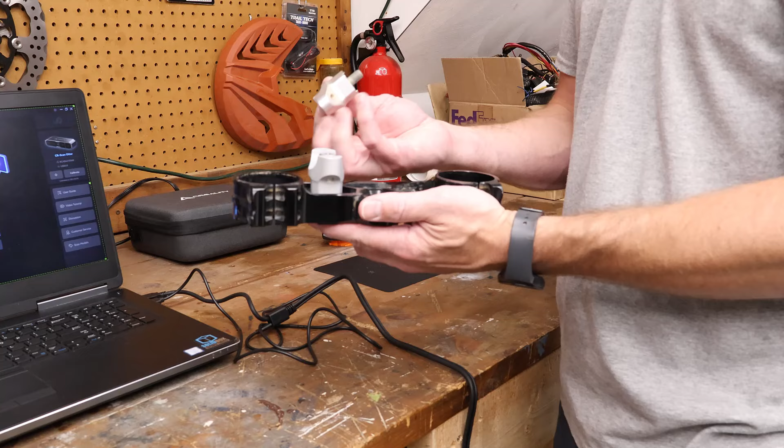The other part for the triple clamp, as I mentioned, generally we want it to be off the platform just a little bit. There are options for us to remove a table when we're scanning, but in this case, what I'm actually going to do is take the bar clamps from the top side. They don't fit perfectly, but they fit just enough on the bottom that I can use them as standoffs. The way that KTM does these, they're actually offset, so I just need to offset them on the short side and make sure that I bind them just enough so that I can set this up and have it be raised up off the area.

The other thing that we want to do is have these sort of paper towel or paper crumpled pieces scattered around random places. Now I'm using the black mat that came with the CR-Scan Otter. It doesn't have any marker dots on it, but it helps give a good contrast between these small white pieces of paper. And we want these sort of around, and what that does is it helps us with these features on this mat. So as we go around the outside, it'll help capture those details a bit easier.

You can place them on the part, but just note that it's going to be a little bit more difficult for us to remove those later. So in most cases, I just try to place them in random places around the object, so that way I could capture it. We're going to be scanning this in medium size object mode, which means the scanner is going to be pretty far away, and it'll capture almost all of the clamp in a single frame. And with this part, we may end up doing it in medium, or we may end up doing it in fine. I haven't quite decided yet. We'll just have to see how it works out.

Now that we have everything sort of ready to scan, I have a couple of other things in here. Sometimes I'll use sockets. These are black impact sockets, but we can also use chrome ones because those won't really get picked up by the scanner. Sometimes you can use these to stand your objects up a little bit higher, and that will help so we can get around the bottom side, around these lips. With this gas cap, it sits up off the ground or off the table by itself, so we don't really need these. But it's handy to just have little things like this around and make sure they are the same height if you're using multiples.

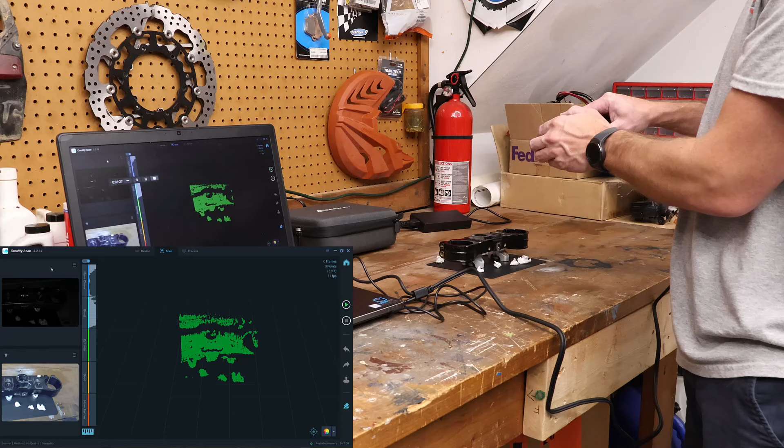So from here we can select scan. I generally like to go in and use manual exposure. And then we'll grab the scanner and use the plus and minus on the scanner itself to get to a good exposure level.

We do want to pay close attention to the distances, the move closer, move farther, and optimal. With medium scan mode, we're sitting at about 10 to 12 inches away from the object. If we go any closer, then you'll notice our exposure value is going to kind of be a problem. You can start to see those red highlights on the corners, and the preview in the center of the screen shows that they're not being picked up. So we do want to make sure we get that exposure value right.

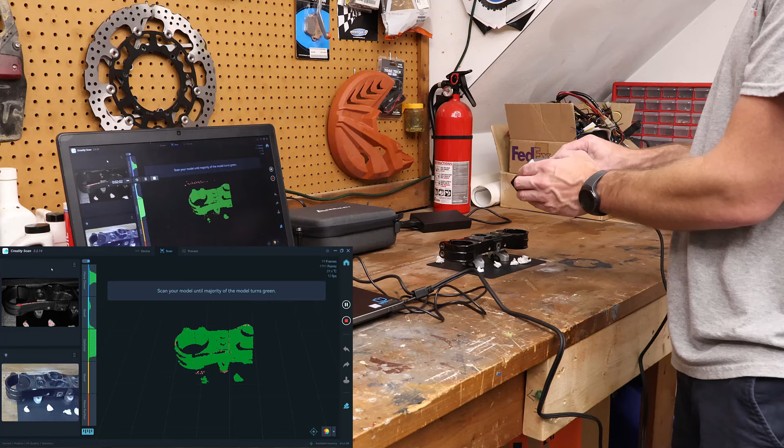And once we're happy with this, go ahead and hit play and start capturing. The first thing that I want to do is capture one side, and I also want to make sure that I am picking up those paper towel markers. Those are going to be important as we go around the outside corner.

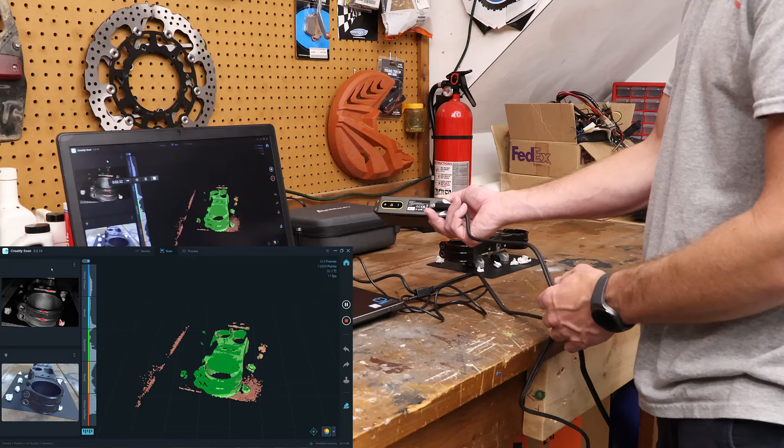Now you can see that we're capturing at about 11 frames a second. The 11 frames a second will change if we're using small mode or large mode, if we're using fast or high accuracy. You'll see a fluctuation in those values. With objects like this, we're generally going to see somewhere between 15 and 20 frames a second as being pretty average. I don't think you're going to get much more than about 20 frames a second on medium or large scans. So everything's looking good so far.

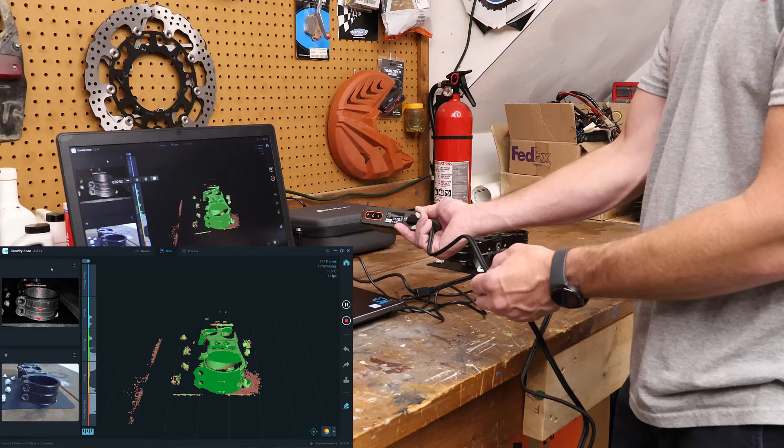I'm just gradually moving in and out, even though I'm outside of the optimal range. I just want to make sure that I am capturing the geometry. If we lose tracking, just move away until you can see some of those paper markers. And we're going to just sort of work our way around the outside here.

Again, trying to get as low as possible. This is where having it spaced off of the table or workbench is important, because we can get down to that bottom edge, capture as much detail as we can there. We are going to flip the clamp over.

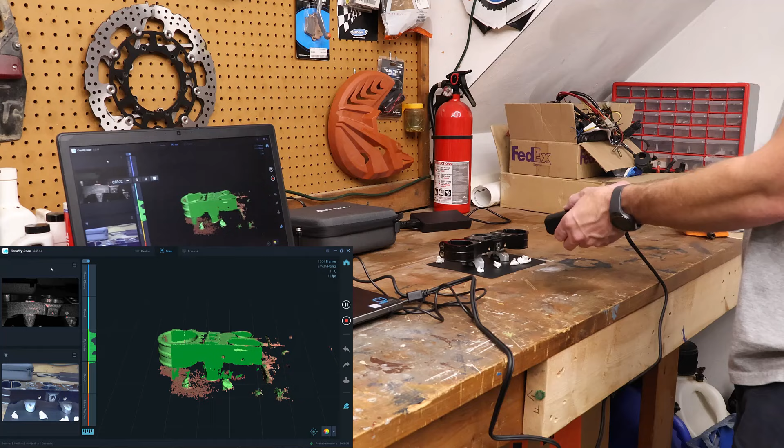And I've noticed with dark objects, I tend to focus on the RGB preview in the bottom left. That seems to be a little bit easier than the top left, which these darker objects, the exposure value really isn't helping us out much. So we can't really see what's going on.

But just move around, trying to keep the object at a perpendicular angle and just move around slowly. Now I could likely go faster than this, but taking our time, especially when we're capturing data that has potential problems because of these circular features, is going to be important. So just work your way around.

Make sure that you are trying to keep some of those little paper towel pieces in view, and that will really help out when we're talking about the automatic alignment during scanning.

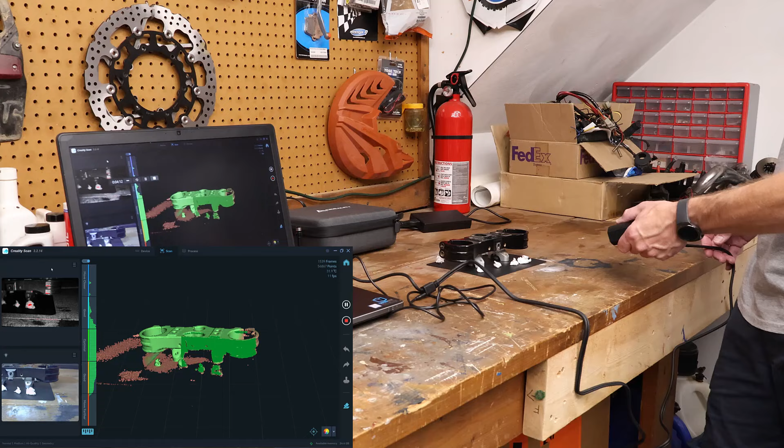All right, you can see everything is turning green, and that's a big thing that we want to make sure we understand when we're using the Creality Scan software. When we see something that's red on the screen, that means we haven't really captured enough points or enough data yet. It really has to be a good, bright, rich green. And once we get that green color, that means we've got enough where we can build a clean point cloud and a clean mesh.

One of the differences between the way that Creality does things and some of the others is once we get this into the software, or once we start processing it, what we're actually doing is we're going to refine what we see on the screen into the point cloud, and then we're going to take that point cloud and turn it into a mesh.

So there's a couple steps to this process, and right now what we're looking at is just a preview of the collected points. It's not actually the raw point cloud data. But make sure that we capture as much as we can. The insides where this actually clamps onto the forks is going to be fairly difficult, but we want to do the best that we can to capture that data.

Again, moving around, trying to keep the scanner at a perpendicular angle. Because I can't see the back of the scanner anymore, it can be kind of tricky to know whether or not we're actually in the right area. If you happen to capture extra data, you can always go back and use undo. We're going to undo just a couple of frames. And then we're going to go back to where we have good alignment. Hit play.

And we'll let it try to figure out where it is in space. Again, here's where the little pieces of paper towel help, because that's really going to help it figure out where the part is in 3D. And then we can move around and again, try to capture a bit more data. I want to do as good a job as possible getting into the bores where the fork is going to clamp.

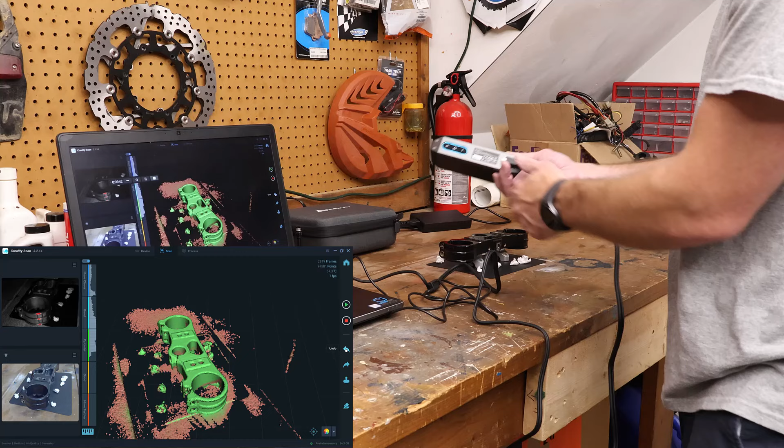Some of this we'll be able to get when we scan the underside as well, but let's just take our time, try to get into those dark pockets. One thing I mentioned is scanning into deep pockets, like the bottom side of the clamp. That is actually something that a laser scanner can do much better, something like the CR-Scan Raptor, whereas an IR structured light scanner really isn't going to do very well.

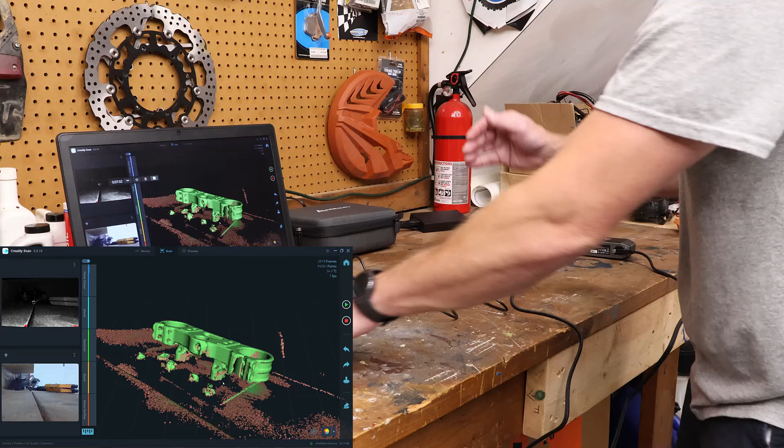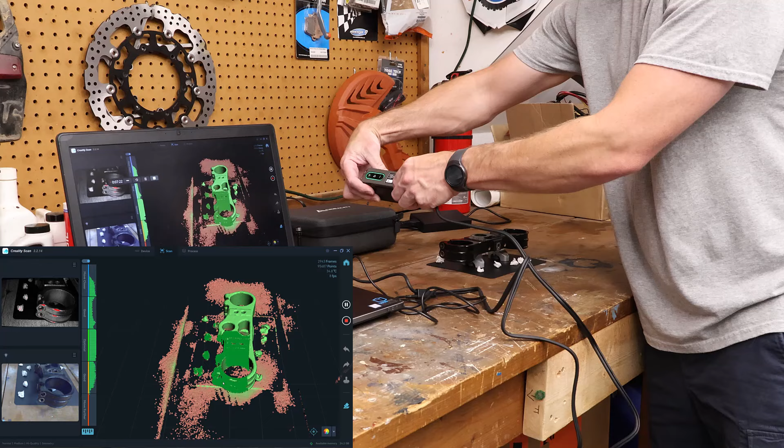It looks like we may be missing a bit of information there on the back side here, so I want to try to capture that before I finish this scan. Let's go ahead and get back to a position where we think it can figure itself out, and I'll work my way around. Again, trying to keep those small paper pieces in frame. That's going to help it know where it is in 3D space and work its way around the back.

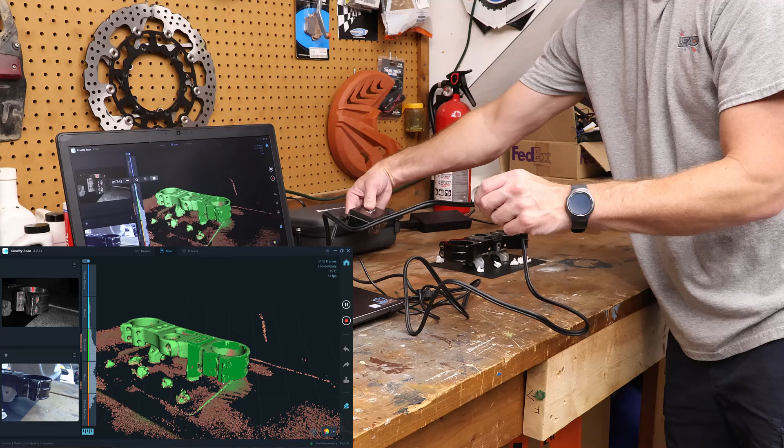So remember, scanners work best when the scanner is perpendicular to the surface. And what I mean by that is the depth cameras really work best when it can bounce directly back from the object to the scanner. If we're at an angle, a couple degrees, it'll be okay. But if we're at a pretty steep angle, it really can't capture that data. So everything looks like it's okay.

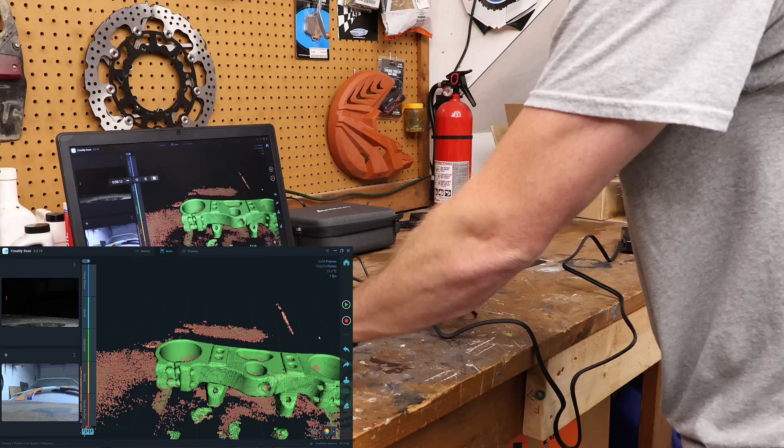I'm gonna see if I can work my way forward, try to get inside of that front section where the fork is clamped, and I'm gonna call it good there. All right, I think that's good. So I'm gonna hit stop to complete the scan. And once we have our first scan, I'm not gonna process it on the laptop. It does quite a bit better on my desktop.

So I'm gonna come over to New Project. We're gonna put it in the same project name using all the same settings and add a second scan to our project. Once again, I want to go to Manual Exposure Mode, and the bottom's gonna be a little tricky simply from the fact that it has dirt and dust in it. And that's gonna mess with it a little bit, but also the fact that we have these deep pockets, it's really not gonna do a good job with the deep pockets.

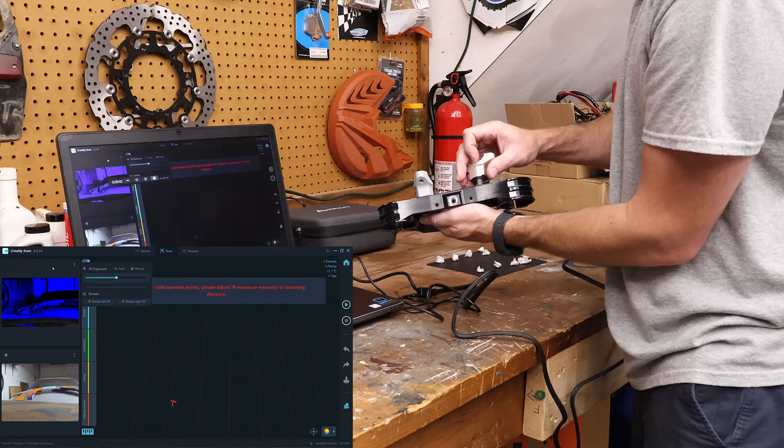So what we're gonna do is we're gonna loosely put these in just so that the bolt is below the top. And we'll do this one as well. And then we'll flip it over. All right, now we can set our exposure and make sure that we're at a good distance.

I'm going to try to go a little bit higher on the exposure, which could potentially be a problem, but let's give it a shot. We can always adjust the exposure on the fly as well. If we feel it's too high, I can hit minus here. So when we get to those areas where there's dirt and potential problems, we can always just play around with the exposure until we capture the data.

Since we're adding the clamps or the bar clamps to the top and the bottom of this, that's going to be a difference between the top and bottom scan. And we need to make sure that we remove those before we try to align the scans. That's something that we need to keep in mind when we get to the next step of this process.

But right now we just want to go slowly. Once again, stay a good distance away. Try to keep all the features in view of those little paper towel pieces. You could, of course, use markers, but I don't like to use markers if I don't have to. One, they're expensive, and two, you have to remove them, not only from the part, but you also have to remove them in the software.

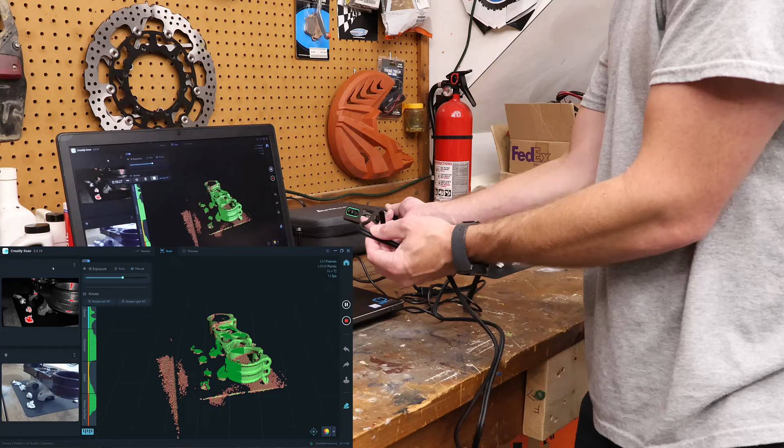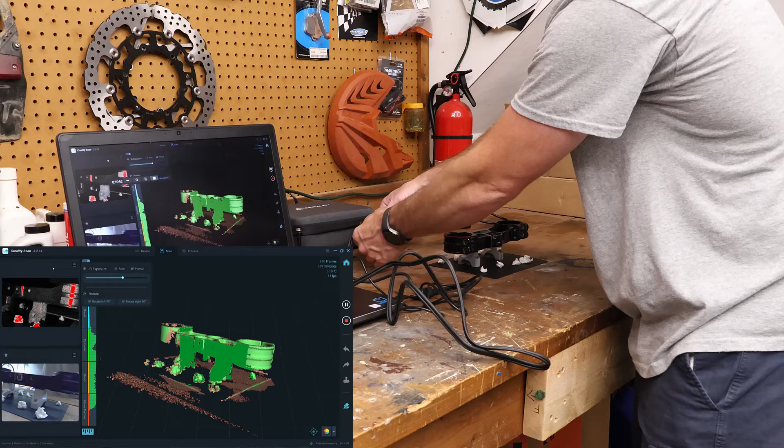So if you end up putting enough markers to use marker alignment on here, you end up with a lot of markers on the part, and it's more of a pain to remove. So if you don't need them, you don't need to use them. All right, let's go ahead and move that out of the way. All right, looks like it's capturing okay.

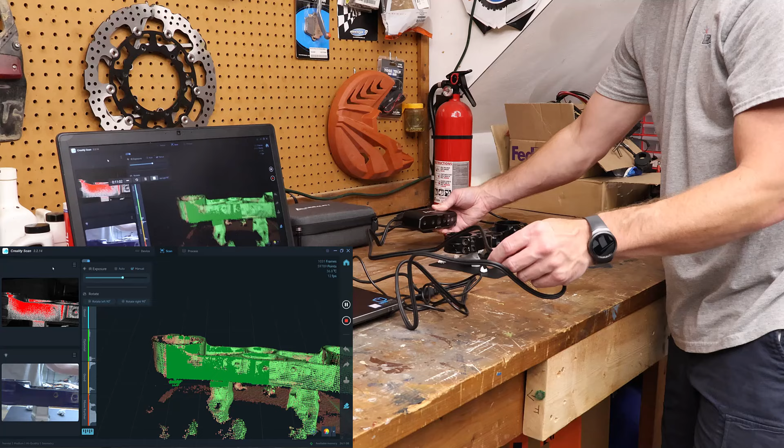Once again, you can go faster than this. I'm going a little bit slower just because I want to make sure that I get everything to turn green. You will notice that there are some areas that it's not turning green quite as easily. But having those little paper towel pieces and having the clamps underneath, that helps.

Let's go ahead, and here's where we're going to start to have problems. You can see it's already starting to spin around. So I'm going to flip this around. And I'm going to come back to here and I'm going to work my way around this way.

Now, I didn't add any extra little paper towel pieces on this side, so I need to be very careful. Otherwise, it'll begin to spin the scan around on the screen. And then we're just going to be kind of lost with alignment. So try to make sure you do keep some sort of unique feature in the view at all times. Work our way around. You can see those 4 little pieces on the back.

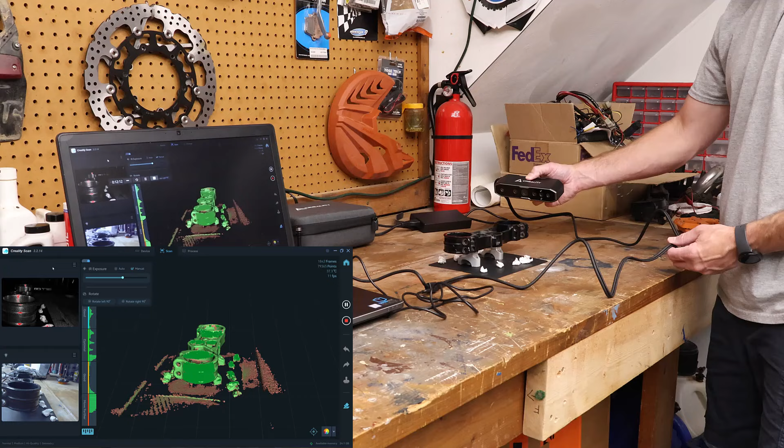Once again, the key here is to make sure everything on the screen is turning green. Anything that's red is not enough data, and once we start to process this and turn it into point clouds, it's going to be filtered out and removed. So make sure that you do take enough time to make sure everything turns green that you want.

Now, if you're just trying to do a quick reference model, you don't necessarily need as much, but if you're trying to take this into CAD and maybe create a new variation, a new version of it, then you definitely want to take your time and get more scan data than you think you need.

Now, I did have a question recently on one of the videos if the accuracy and precision of these could be used for CMM. Now, CMM is basically a high precision measurement. CMM is typically used after you CNC machine parts or manufacture parts to validate their sizes.

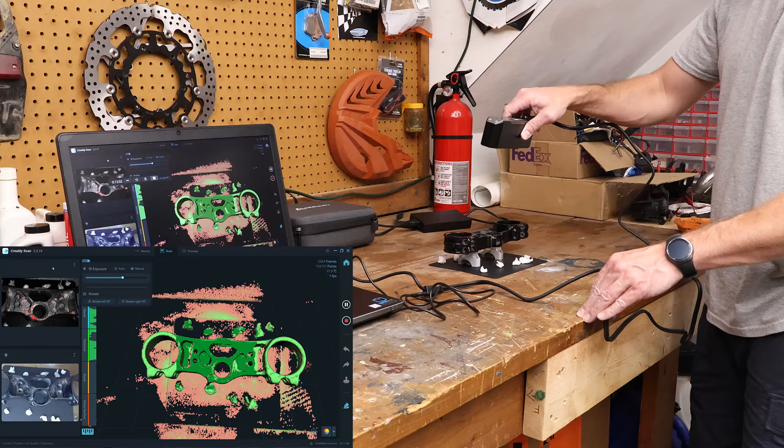And no, I don't think that we could use this scanner or really any of these consumer type scanners for that type of work. While you can get plus or minus 0.02 millimeter accuracy, it's not going to be to the level where you can use this as an inspection tool.

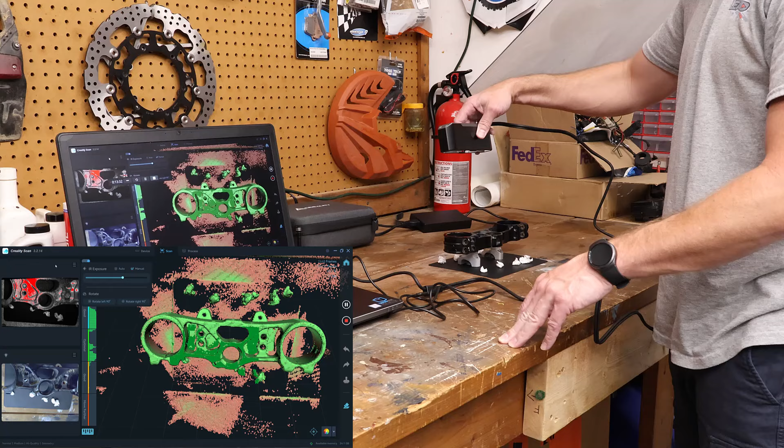And also something to consider is you really need additional software to do inspection. Inspection is something that is fairly unique. And there are, of course, pieces of software that are dedicated to that and based on 3D scanning software or 3D scan models. And Creality doesn't have anything like that. And they're not really in that segment or that market.

Maybe in a couple years, 10 years, we'll see that happen. But for right now, you need to spend quite a bit of money on both hardware and software to have something that would be capable of doing metrology grade scanning. Now, I know some of you will say, well, on Creality's website and other websites, they say metrology grade. That's really coming down to the numbers.

So if we look at the accuracy, the precision, the resolution, those numbers are where those figures come from. When they say metrology grade, they mean plus or minus 0.02 millimeters, and that's considered metrology grade. That still does not give you the ability to do things like part inspection. You need additional software to do that. We can talk about that on the channel, but it's not generally something you do with these hobby scanners.

And I call them hobby scanners because really, when you're spending $800-900 for the CR-Scan Otter, that's different than spending $20,000, $30,000, $40,000 for other scanners that are considered metrology grade and professional. So it's just a different segment. Same thing with 3D printers.

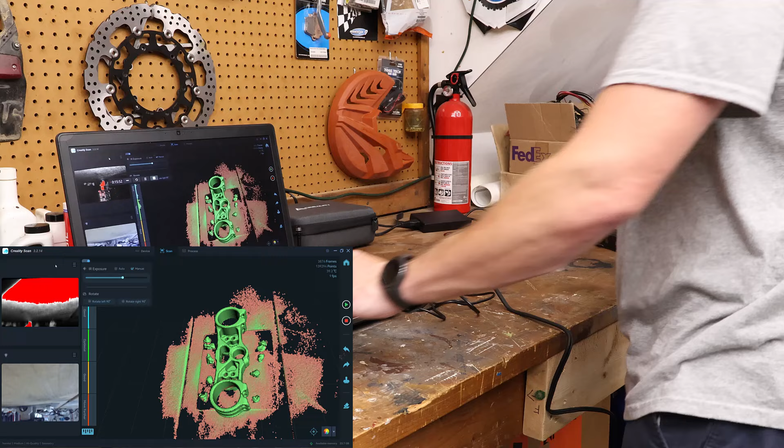I think we've got more than enough, but there is definitely a problem trying to get into these pockets. The pockets are obscured by the clamp itself, and it's not something that we're able to do. So one thing that we're probably going to have to do is leave those open when processing, and we could manually fix them. But if I zoom in here, let's rotate this around.

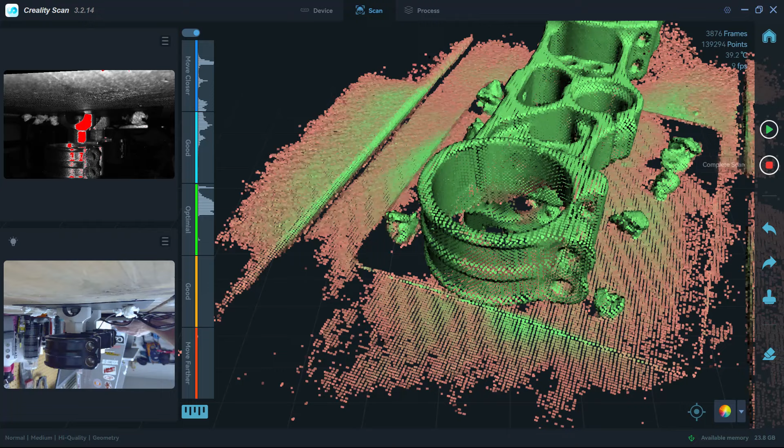So basically what we're seeing is we can't get this face right here because the clamp itself is preventing a straight line to go into those pockets in those areas. But I think we've got enough that we can put together two models. So I'm going to say stop and complete the scanning. Now from here, I have both of those scans. I'm gonna go to my desktop to process them.

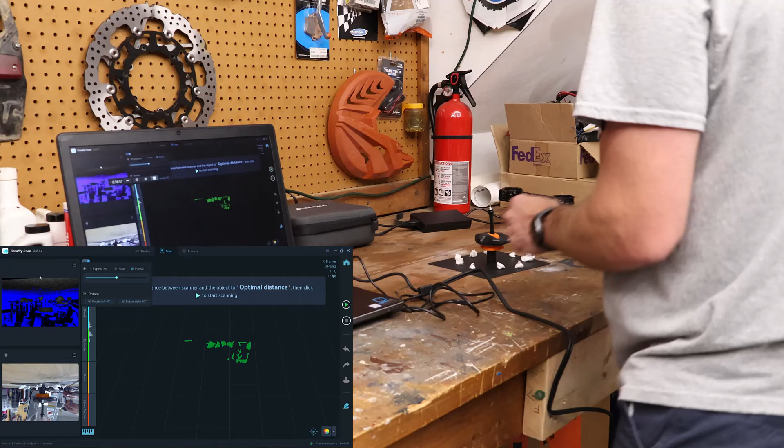So we're gonna go back to the home page. I'm gonna put this off to the side. And we'll just take a quick look at the gas cap. Now, as I mentioned, you generally want to possibly raise this up. We're gonna start a new scan. I'm gonna call this one gas cap. We're gonna use the medium object, all the same settings. And once again, I prefer manual exposure so I can control it rather than having the software figure it out for me. So we'll increase that.

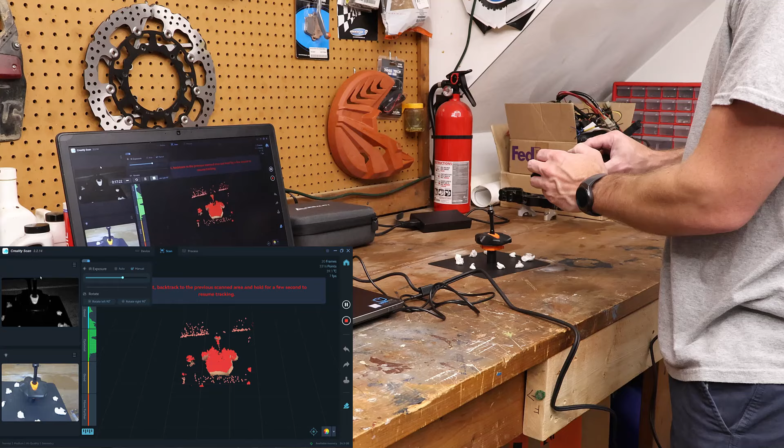And the orange section in the center is gonna be a problem, so we're likely gonna have to tweak this on the fly, but I really wanna capture the black areas. So may need to drop the exposure down and see what we can do. There we go. So with something like this, we need to go slow until it captures enough data that it can find itself in 3D space.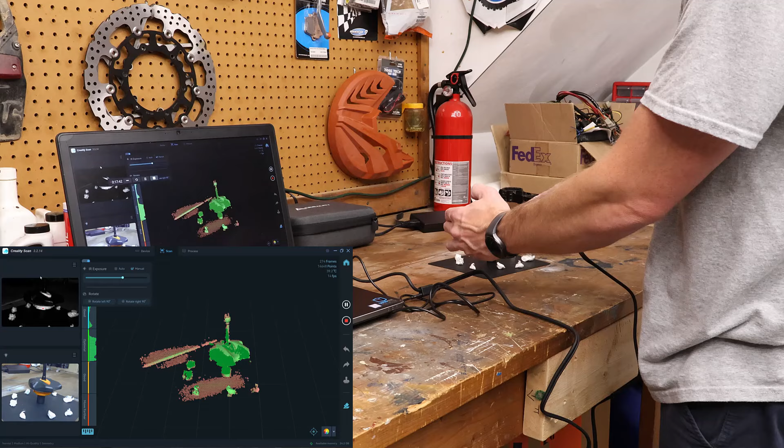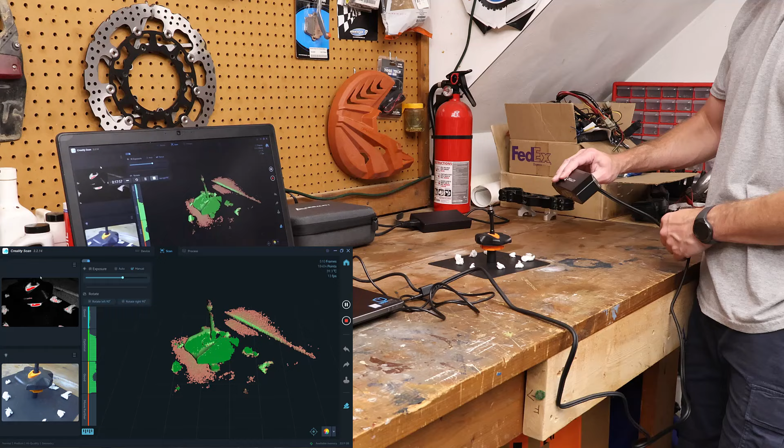The fact that this is raised up off of the table is probably making it a little bit more difficult, but once we capture enough that it knows where it is in 3D, it'll help us out. But in the initial run, it makes it a bit more difficult because it has to figure out it's not sitting on anything. It's kind of raised up in 3D space. And we can just, once again, move around, trying to keep those little paper pieces in view. The paper pieces are really a key to this process. So we don't have to use markers. Just work our way around the backside.

And once again, I can't stress enough that when we're scanning, the scanner really needs to be perpendicular to the object. So we can't just keep it at the same orientation the whole time, especially if we're going around a round object. We need to try to move and keep it pointing in the right direction. And keep in mind that we've got these sort of face and surface features that we need to capture perpendicular to their geometry.

Now, I don't really care about the vent cap on this. I could have pulled it off, but it's just going to be a reference because the tube is actually bent a little bit. What I mean by that is it's kind of skewed to one side, and that'll also help it a little bit with alignment. So just kind of work our way around. If we could get this in a single scan, it would certainly be beneficial, but we're going to do 2 scans.

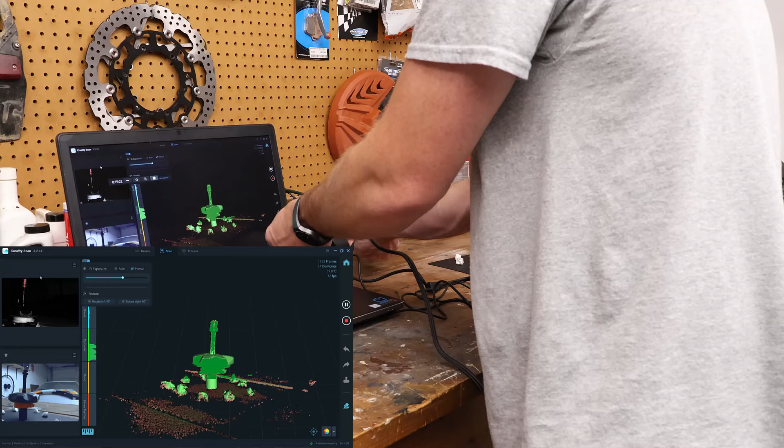All right, I think I've captured everything. The socket will have to be removed, of course, but I think I captured everything. So let's go ahead and pause this and just take a quick look. Looks like I could maybe use a bit more on the front side. So I'll go back to a front view where it can find those pieces of paper, start the scan again, wait for it to find it.

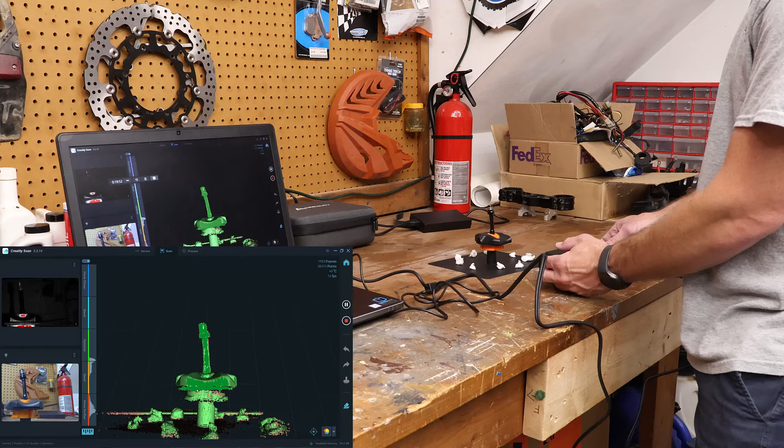It is important that the pieces of paper are different sizes and different orientations. That's going to be a big part of making sure that it knows where they are in space. I'll work my way around just a little bit. Pause. And we'll call that good. Right now, I'm really only concerned with the top.

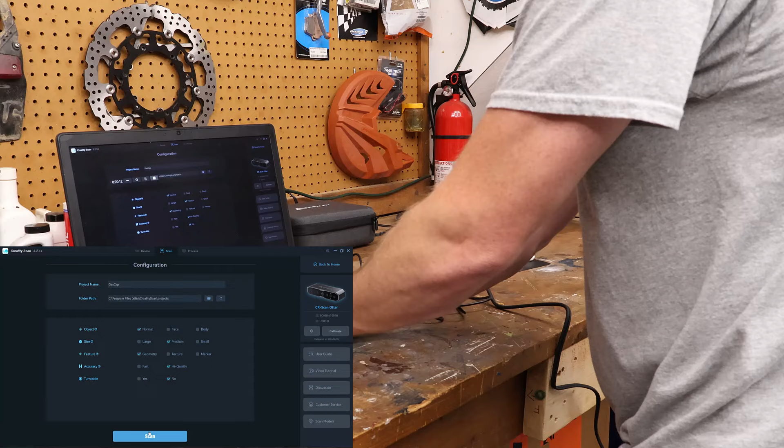And then we'll add a new project. All the same settings for right now. And I am gonna try to scan the bottom. This is going to definitely be tricky. Let's go ahead and make sure that we are using manual exposure.

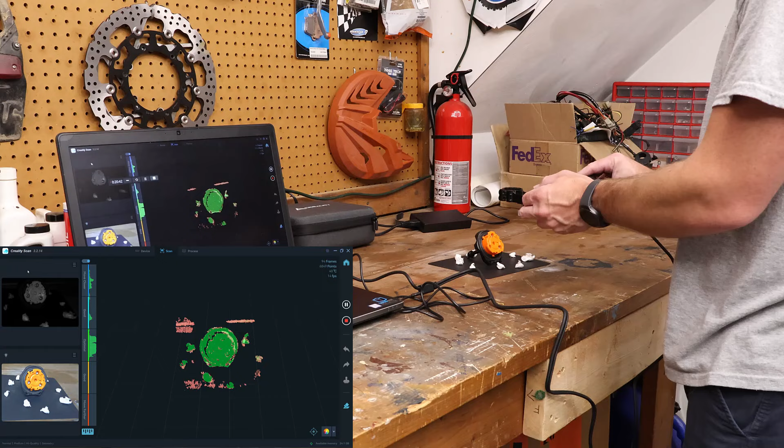The bottom is going to be tricky. It's a lighter color than the black, so again, we'll probably have to play around with the exposure on the fly. Make sure that we do get those pieces of paper so it doesn't try to rotate. Get the bottom first and all the pieces of paper so it has those references, and then work our way around.

This piece is actually a multi-piece assembly. We could take it apart and scan all the individual pieces, but for right now, that's not an option. Just gonna leave it together.

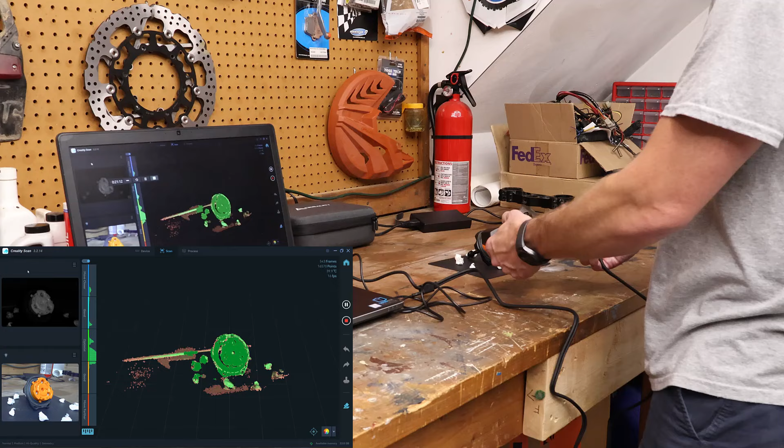I do want to note also, and I'll mention this when we get to processing, in talking with Creality about options in the software, I asked them about the ability to align multiple scans, which it can do, but allow the user to not merge the scans together. And they mentioned that they are working on that, and that it'll be in the next release of the Creality Scan software.

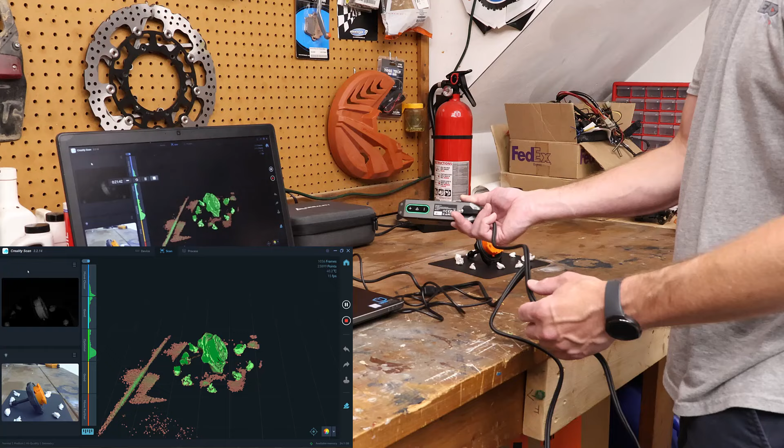So they are actively improving the software, and I know I've mentioned in other videos, that's really the big thing holding the Creality scanners back. The hardware is great, the software is what's lacking compared to other options on the market. But they are actively working on it, which is great news. So if you do have a CR-Scan Otter, or if you purchased one of the new Raptors, or if you're using something else like the Ferret, just know it sounds like those things will be getting better.

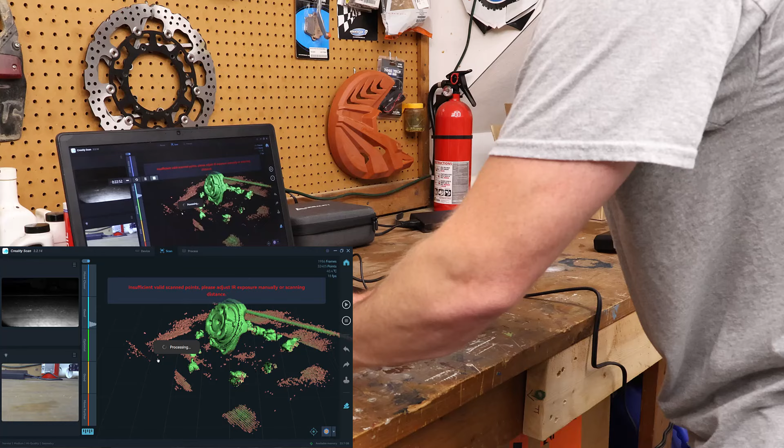All right, let's pause there. Stop, and we'll get one more scan before we take this up to the desktop. All the same settings, just flip it over. Once again, we'll use manual exposure. If you like to use auto exposure, that's perfectly fine. I personally have found that I prefer the ability to use manual exposure on the fly. It seems to give me better results, so it's kind of what I like to do.

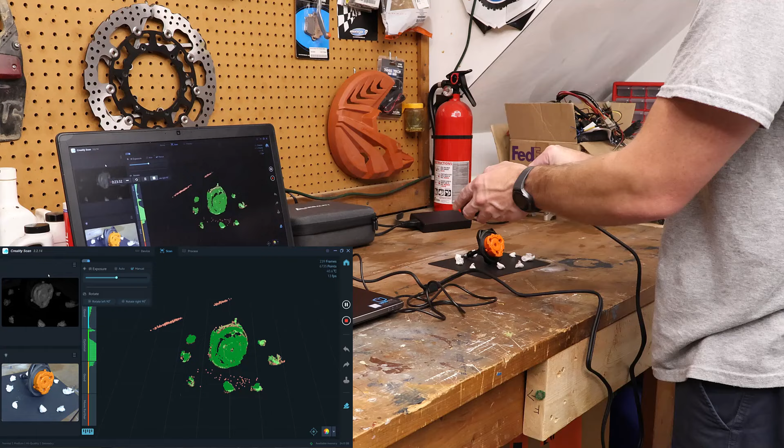Once again, these first couple of frames, stay fairly still and just try to get all the little pieces of paper around the object. Once we at least have those references, that will help with tracking in 3D, and then we can begin to work our way around. The main thing that we need to capture here is going to be the outside frame. I think ultimately we're going to have to do these 3 scans together in order to get a complete cap.

There will still be holes again because these types of scanners, whether it's blue structured light or IR structured light, aren't really good at scanning down into cavities, so these pockets and areas where they're kind of occluded. A laser scanner really does much better with something like that, whereas a scanner like this, or pretty much most of these scanners on the market, just don't have the ability to get down into those areas. And let's see if we can get back to the alignment.

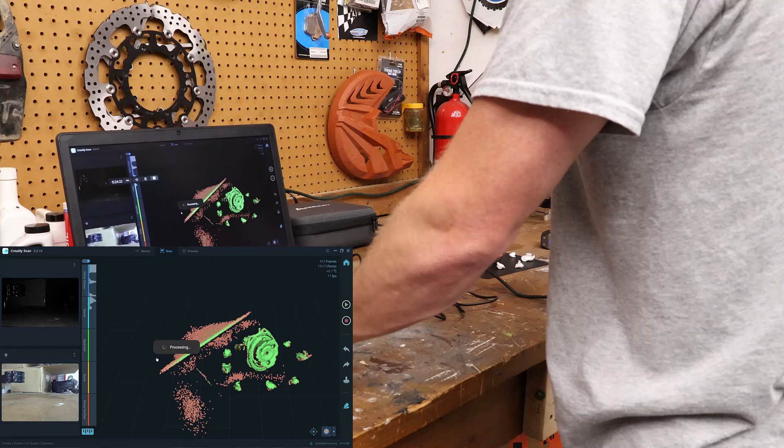All right. I think at this part we're probably good. In general, I say that you always want to capture more than you need, and that's universally true. It's much easier to capture more scans now than later on and have to come back. But for right now, I think we've got enough. The first scan is really the key, making sure that we got the entire top. And then the 2 scans on the bottom, we'll have to merge everything together to make that single version. But now that we have this, let's go ahead and take it to our desktop.

So now we're at the desktop, we can begin to process the scans. Now, it should be clear at this point that everything we did in the garage was real time. Nothing was sped up. That was the entire time it took to create those scans and set everything up. And obviously, without narrating, it can be done quite a bit quicker. But what we're going to do now is open the projects because I have them saved. So I just need to go to where I saved them.

And we're going to start first with the triple clamp. Select the OBP file, which is our project file, and this should open up both scans, the top and the bottom scan. Now, I mentioned this in the garage, but it's important to note that with Creality, the first step in this process is not truly the raw point cloud data. If we zoom in, it's probably going to be impossible to see on the screen, but we're seeing a very well-structured set of points.

And what we need to do is sort of optimize that. So the first thing that we're going to do is get rid of some of this data. There's stuff hanging out here. So we're going to use the lasso, hold down Shift and the left mouse button, and just start to clean things up. There are a couple of ways that we can do this.

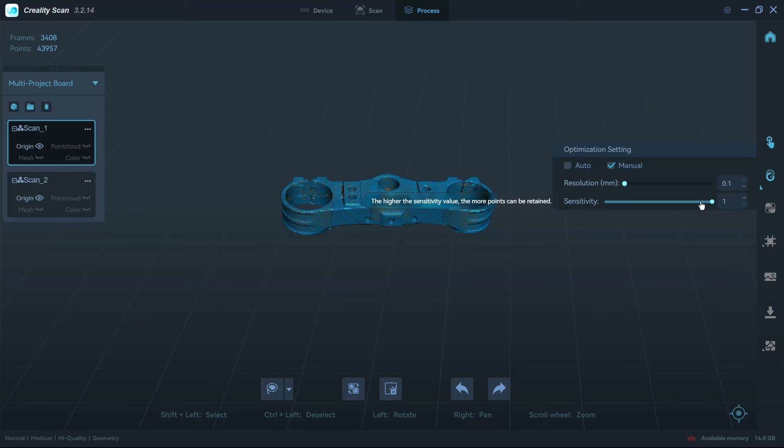When we talk about the sensitivity, this is one of my gripes with Creality because it doesn't really give us a lot of options compared to other software. We really only have these two sliders, the resolution and the sensitivity. But the sensitivity, when it's higher, will retain more of the captured points. If we set this lower, it will be able to filter out a lot of those points. We have to be careful with this step in the process.

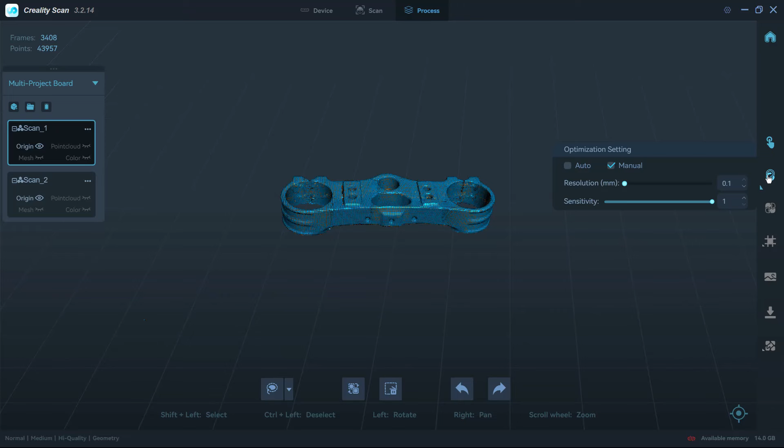Unlike other scan softwares, when we do things like merge the scans together, the original data is deleted, it's lost, at least to the best of my knowledge. In talking with Creality, I mentioned trying to do alignment of multiple scans, and in those instances, we don't want to remove the original scan data and we don't want to merge it. They are working on that, and they told me that it would be in the next release of the software.

So that's great, and that allows us to do things like, in the case of the Xbox controller I posted about, scan the controller with the battery door, scan the controller without the battery door, and scan the battery door on its own. And then we can have a mesh that we can use to align both of those pieces. So we can have the original scan that would align the battery door with the controller. And then we can also align those individual scans, process them, and export them on their own. That way we've got them aligned to the same coordinate system, theoretically.

And when we actually go in to do some CAD or some design work, then we'll be able to have individual mesh files rather than just having one all merged together. Now, the scan capture part of this process and everything that we do here, I'm going to leave at real time, with the exception of this optimizing.

Depending on the number of points that you're dealing with, and here we've got 3,400 frames and about 44,000 points, it's going to take a differing amount of time to optimize. So in this case, we're at 45% and it's been a couple minutes. Probably looking at 3 to 5 minutes to process this. So we're going to go ahead and pause and we'll check back in after this one's processed.

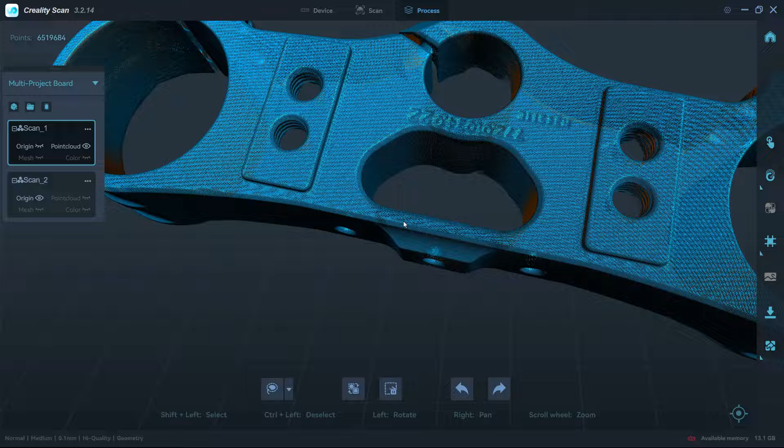All right, so it's done now and we can see it looks pretty good. We have a lot of detail. We can see the part number here. This is a 22 millimeter offset clamp, and we can very clearly see the 22. Remember, this was done on medium, not the smallest scan setting which has the highest level of detail. This was plus or minus 0.1 millimeter resolution, not the plus or minus 0.02.

We need to do the same process for the backside. You can see areas where we maybe didn't have enough data. During the scan process it was mentioned that these are areas that are hard to get to, little areas where they sort of self-shadow. It's generally called ambient occlusion, but those areas are more difficult.

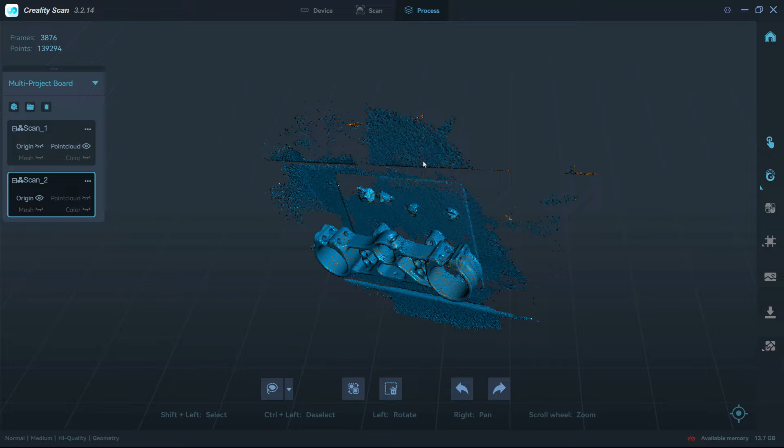So what we need to do now is just repeat the process. Again, I'm going to keep everything real time. It doesn't really do us any good to speed everything up, so I'm going to do it real time until we get to that processing.

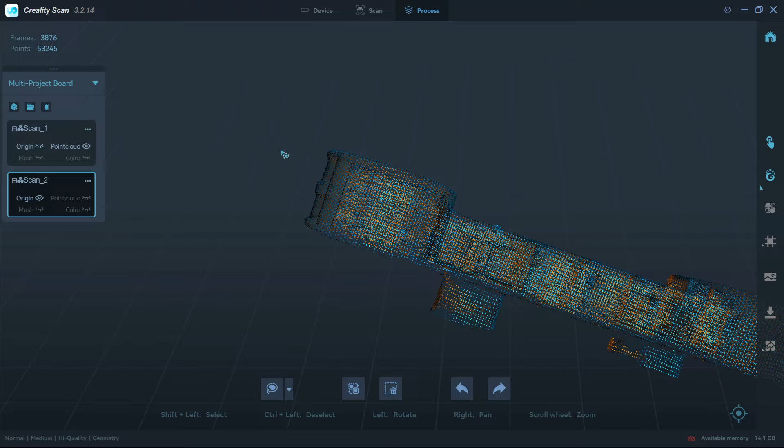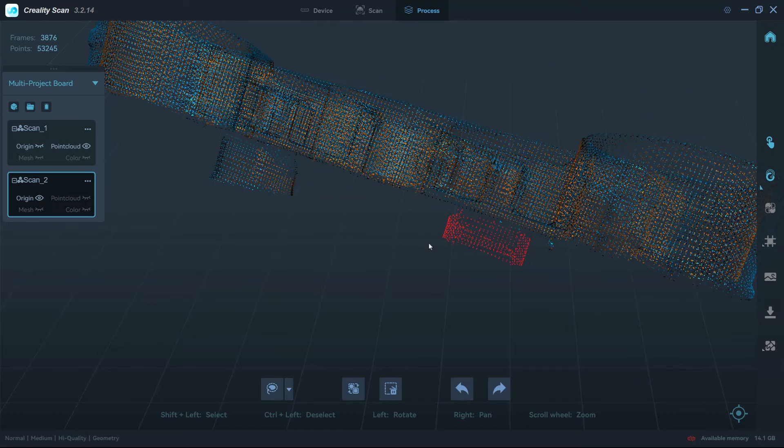Let's go ahead and zoom in here. When we see points floating out in space like this, it generally happens when the exposure setting is too high, like we have a lot of red on the face of our part. What ends up happening is those are essentially reflections bouncing off the part, so it gives us this problem where the points are not where they're supposed to be in 3D space. That's what we want to avoid, and that's another reason why I use manual exposure. It allows me to take care of that manually, and I don't have to worry about those points. If there's something I need to capture, I can raise or drop that exposure level manually.

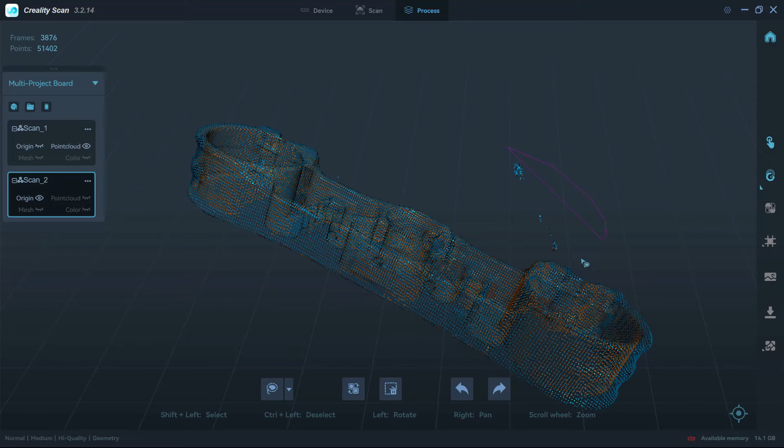I don't really need much in the way on this bottom section. We really mainly are looking for enough overlap on the side that we'll be able to align multiple scans. So again, clean this up. If there are some points floating in space, like a point here, that's going to get filtered out automatically. Really, the main area that I'm worried about is inside of these pockets.

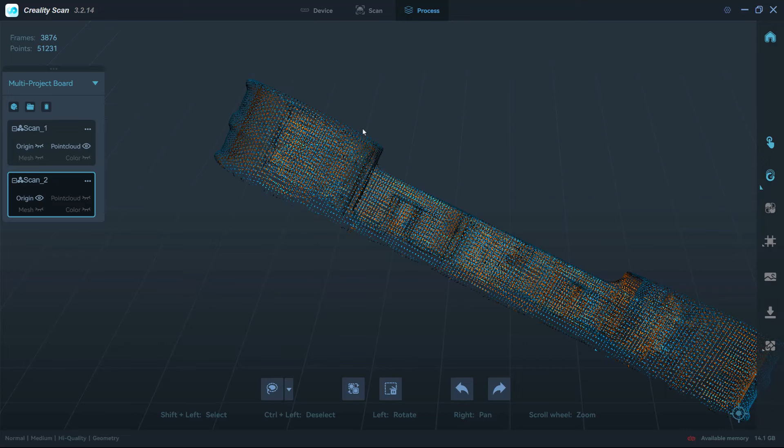As I mentioned, the clamp is sort of self-shadowing. If we look at it from this view, there is no way that the camera or the scanner could see down into that pocket, because the angle it would need to be at would be looking through the inside of this corner. But let's double check our settings. It looks like I maybe clicked a bit too quick. What we want to do is double check those settings and make sure that we optimize properly. So I'm going to pause this and we'll check in once this one's optimized with those same settings.

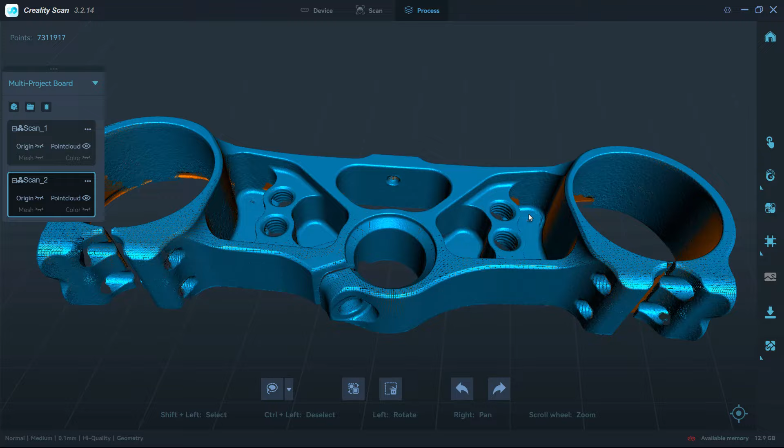All right, now we can see that it's done. There are obviously a few areas where we're missing data, and that's okay, we don't need it to be perfect. If you are looking to get into all these areas, then using an IR structured light scanner is just not going to work. You really do need something like a laser scanner, and hopefully the Scan Raptor is something that would be able to do this. Once we get our hands on it, we will try to rescan this part.

But right now we've got point clouds optimized at the same level for the bottom and the top, and what we're going to do is try to combine or merge these together. What we need to do is come over to the right side and talk about point cloud merging.

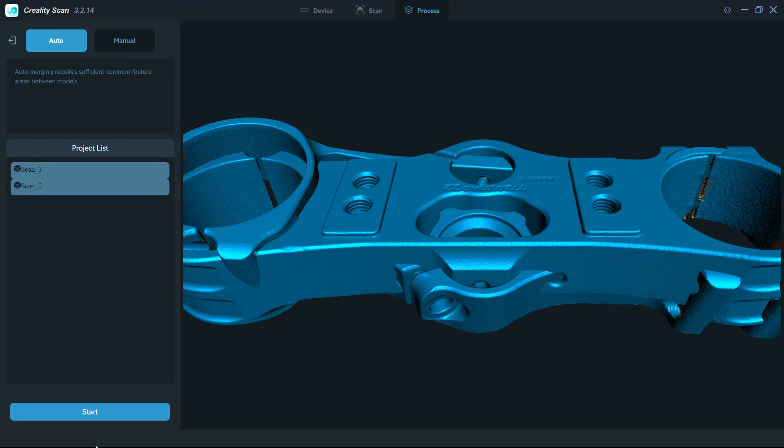When we have point cloud merging, there's two main ways, auto and manual. The auto method I found is actually pretty darn good. So what we're going to do is select both scans and select start. Hopefully there's enough data here for it to be able to find a solution, and it happens relatively quickly, but obviously this isn't right. You can see this clamp area should be on the bottom, and it's basically on the wrong side. It's using this reference here, which is okay, but it's incorrect.

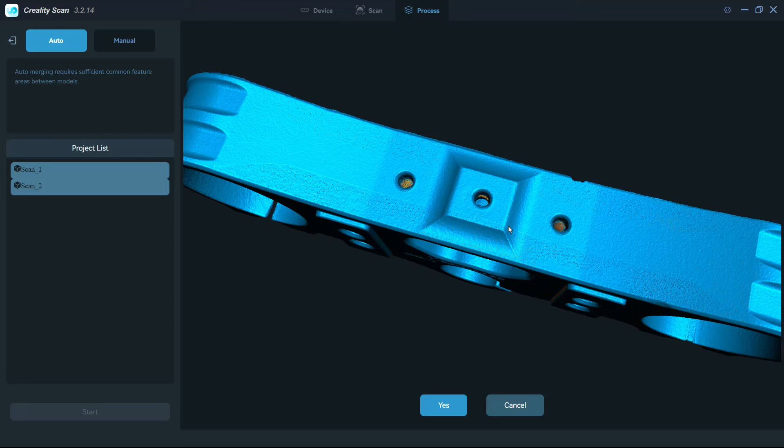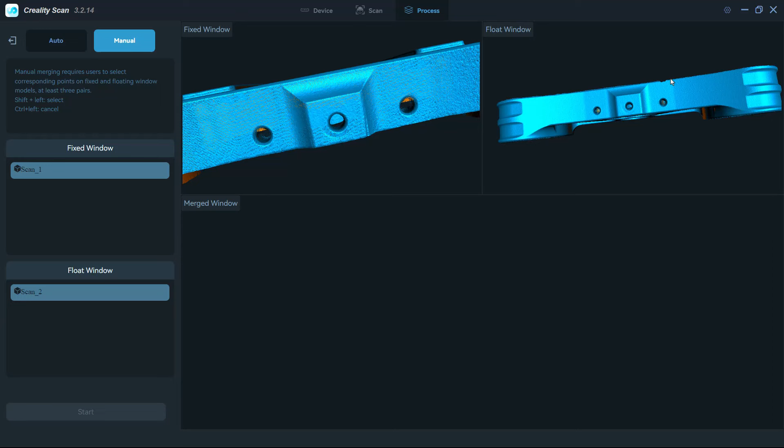So we're going to hit cancel and go to a manual option. Fixed window 1, we'll select scan 1. Float window, we'll select scan 2. So we're going to rotate this around. One of the potential issues here is going to be our references. So what I want to do is try to align these in the same orientation, like this.

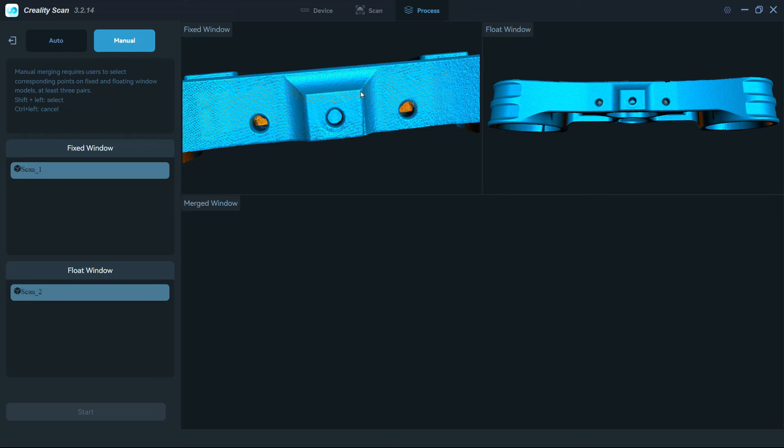One thing it got wrong is it assumed the geometry here, this sort of ball end mill that was run, was the same on the bottom, but it actually ends flat here, and we can kind of see that if we rotate this around. So it didn't quite have that data. What we're going to do is start to pick some points. I'm going to pick a point here at the top in this fixed window, and here on the top over here. Just like when we're drawing a box and trying to select geometry, we have to hold down Shift and click to place a point.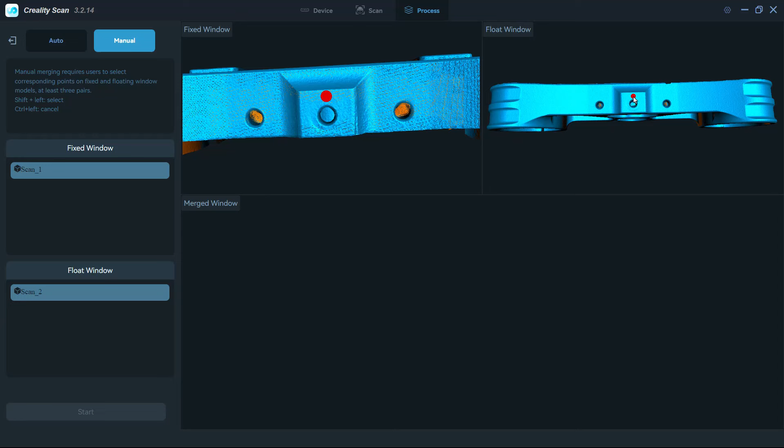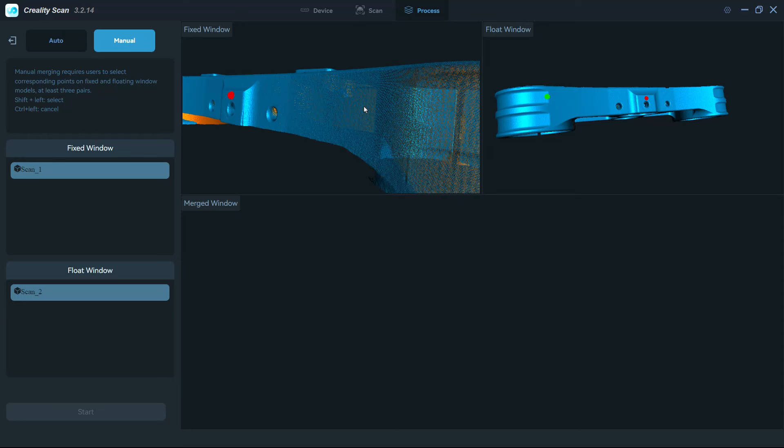And then we'll do the same thing over here, shift and click. Then I'm going to zoom out on both of these, and we're going to rotate around and come to right about the point where we get into this section around the fork, and that green dot will go there, and a green dot will go there. We'll come over to the other side, maybe zoom out a little bit, and we'll place one on the bottom section here, right around there, right around there.

So 3 points is enough, but I'm going to rotate this around, and I want to give it some additional references as well. We've obviously got this clamp area here, and I want to give it a reference in about the same location. So we're going to shift click and left click here, and we'll place one here. Hopefully these will give it quite enough points.

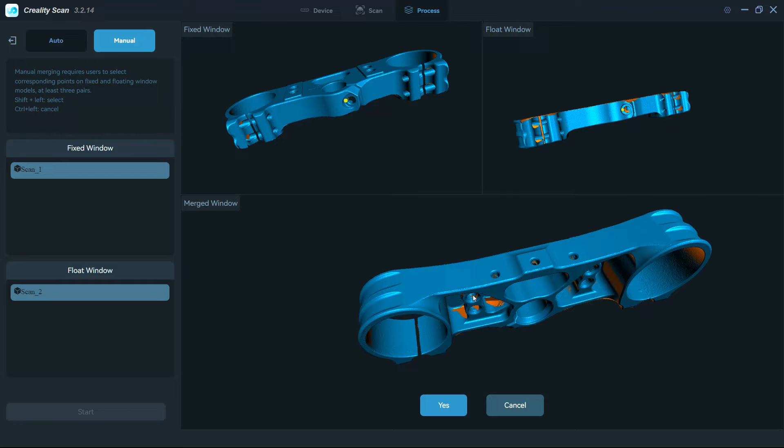So let's go ahead and hit start. And now let's take a look at the merge results. That's looking quite a bit better. So I'm happy with those results. The orientation is good, all the parts look like they're in the right place, so we can say yes.

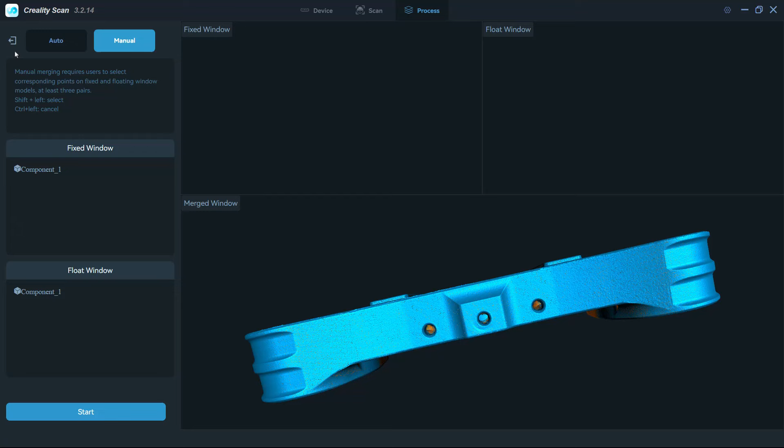It's going to optimize this. It's going to go through, and what it's going to do is create a merged point cloud. Once we're done with our merged point cloud, we can hit exit merging page, and what's left is our component. Now the component is a merge of scan 1 and scan 2, and this is where I had a question for Creality.

Basically, what I was hoping for was the ability to not merge these and optimize them, and they're working on that. You'll notice that there is a potential problem here—we kind of filled in that area of the clamp. Not a big deal, we can still do some manual modifications if we wish.

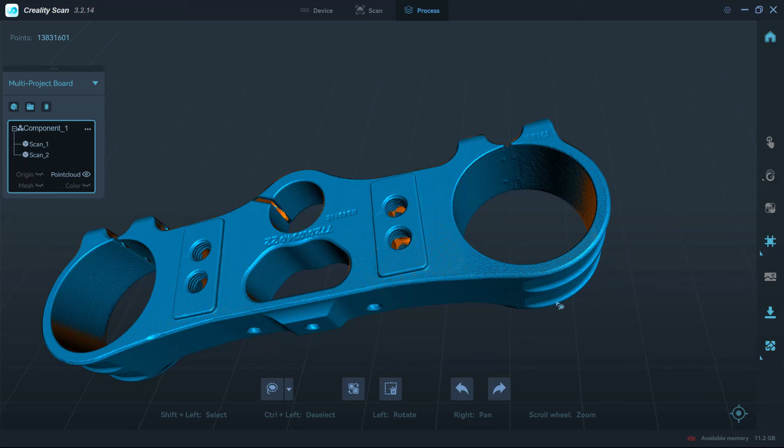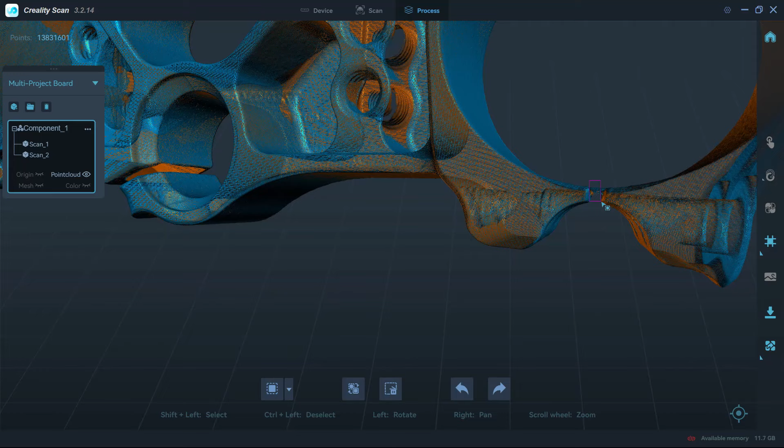If we go to this lasso, you can see that there is a rectangle select. And if we rotate this around, we can maybe get to an orientation where we can do a rectangle select, probably from the top. Let's see if we can rotate it. Right, maybe zoom in. And see if we can maybe cut that out. Can hit delete. And it's not perfect, but again, we're just cleaning it up.

The next thing that we want to do now that we've got our point cloud, as we can see over here in the bottom left, is we've got the origin, which was the original raw data, the point cloud, which has been optimized, and now we need to move on to the mesh. On the right-hand side, we can determine the faces, the denoising, and whether or not we want hole filling.

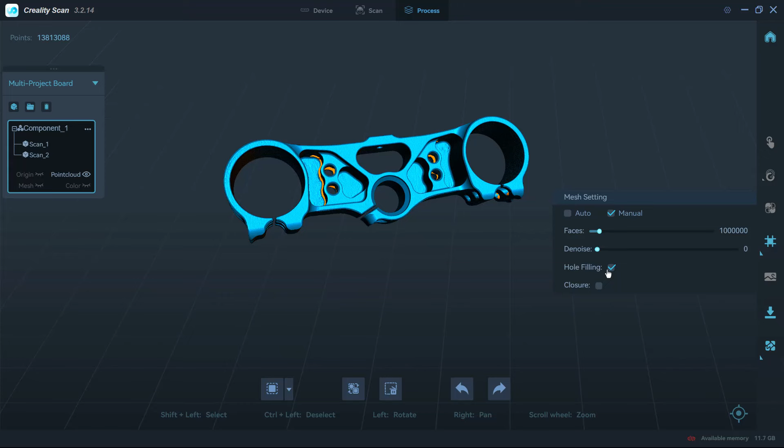Now, hole filling is something that we can potentially do manually. If you turn this option on, this is different than closure. So what hole filling does is it's not trying to create a watertight mesh, but what it is trying to do is fill in any potential gaps there is inside of our point cloud data.

Where this is going to be a problem is that we've actually got some pretty big holes and open areas here. I don't know how it's going to handle that. I've actually not done this before—we're going through this real time live. This is the first time that I've scanned the clamp in this way.

So what I want to do is think about my options. We've got faces and denoise. Denoise will allow us to do some smoothing, but you'll notice that this goes from 0 to 3. I'm going to put this at 1. I don't want to do a lot of processing here, I just want to do a little bit.

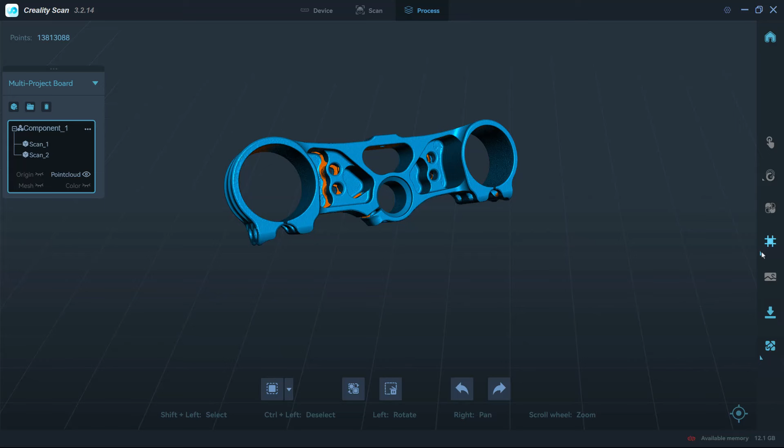And I can limit or try to get to a specific number of faces. This is always a tricky one, but I found that you really don't want to crank this thing all the way up. You want to keep it into a fairly low number if possible, because keep in mind that here we're already at 1.25 million faces. So if we can get it to be as low as possible, that's going to help us downstream when we take it into Fusion or SolidWorks or something else. So let's go ahead and click Process, and we'll see what this thing looks like.

One thing I want to mention is that we are able to redo some of these steps. After the meshing process, we can remesh it. Like I did with the point cloud, I used the wrong settings initially and redid them to optimize it. But there is a limitation to how much access you have to the raw data. This is why it's important to capture as much or even too much data at scan time, so we have extra to work with during processing.

So now we've got a final mesh. One thing we can see is that the edges look a little rough. So I'm going to go back to my mesh settings and increase the number of faces. This will allow me to capture more detail, and then I can do some post-processing, maybe a remesh, to try to preserve those sharp edges.

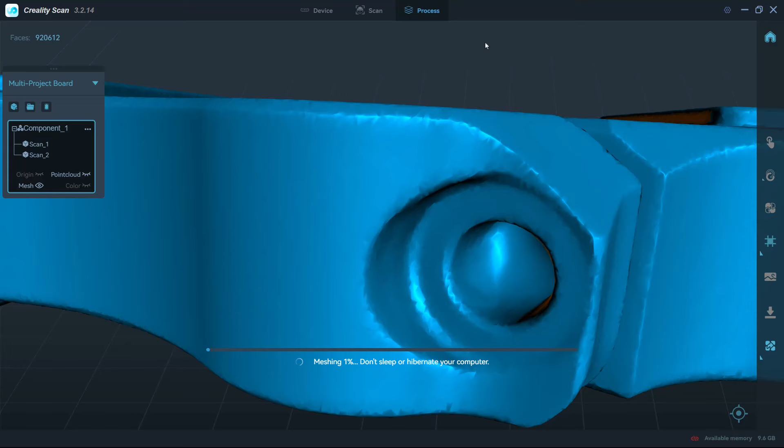So I'm going to do this one more time. Again, this does take a couple of minutes depending on your computer, but it will allow us to see a quality difference in the edges and whether we can capture a bit more detail.

All right, so now we're done. If we zoom in, we can see there are still some variations in the edges, but that's basically what we'd expect with a mesh. We can continue to optimize this by adding additional faces and remeshing, but the process does take quite a while.

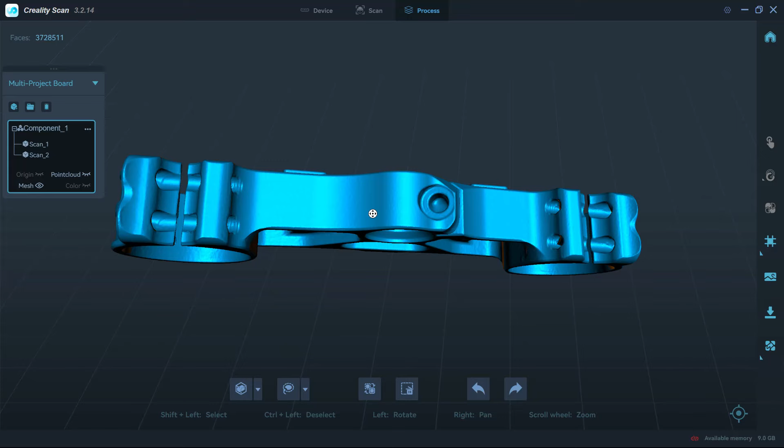Overall, I'm really happy with the results. I think there's plenty of information here that would allow us to reverse engineer this part. Obviously there are some holes in certain areas, but we could get the locations of the bar clamps. We have all the information we need on the overall size, and we could take this into Fusion or a CAD program of your choice and begin working with it.

Now, what we're going to do in this video is stop with this part. I'm not going to go through the same process with the gas cap because honestly, it's identical. It doesn't matter if you're doing it with a triple clamp, a gas cap, or something else - you still have the same process of optimizing the point clouds, merging multiple point clouds together, either automatically or manually like we had to do, and then converting it to a mesh.

Hopefully there'll be some updates in the future to the next version of Creality Scan. But what I'll do in the description of this video is put links to mesh files done with the Otter, so you can take a look and get an idea of the resolution and what the parts actually look like.

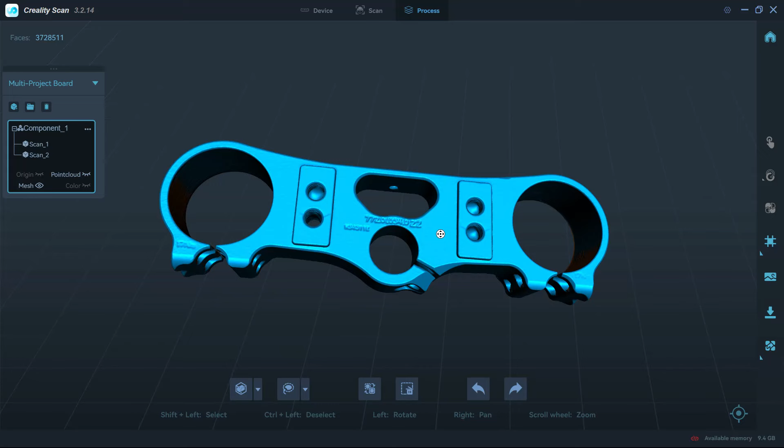Now I'm really happy again with the medium level of detail, seeing the part number and the information we have here. We certainly could have captured some of the other information better had we used the small option, which has 0.02 millimeter resolution. But for what we need with this clamp, I think the medium size option was more than enough.

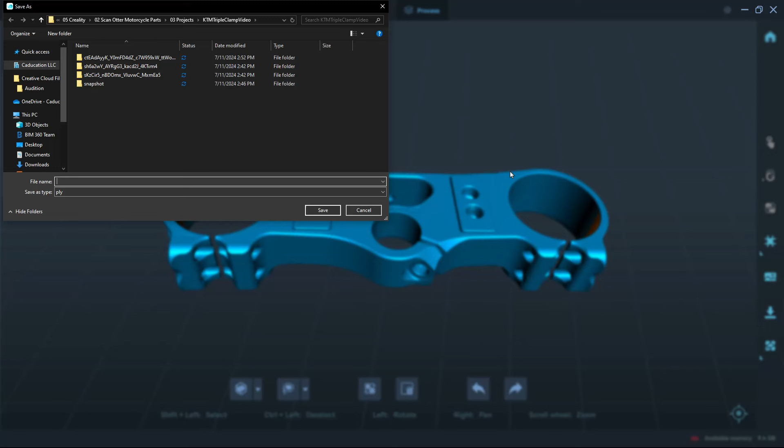Now, if you have any questions on this process, please let me know. I've covered this software before, so at this point all we really need to do is export this mesh, and then bring it into Fusion or some other program, which we've covered on this channel many times before, so I don't feel we need to go into that again.

But if there are any questions on anything we did here, from the setup and scanning process to how we processed the mesh, and how we essentially work with the Creality CR-Scan Otter, please let me know.